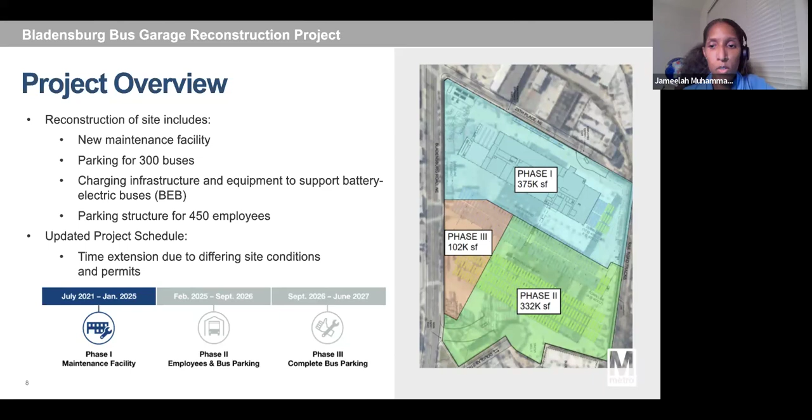We're currently in the first phase, shown in blue on the slide, which consists of the replacement of the maintenance facility, and this will now take place from July 2021 to January 2025. During the second phase, shown in green, we will focus on building the employee parking garage, as well as some bus parking on the ground level, from February 2025 to September 2026. During the third phase, in orange, we will complete the bus parking area. This takes place from September 2026 to June 2027.

We continue to maintain best practices for cleanliness and noise control at the construction site. This includes daily cleaning of work areas, waste receptacles and dumpsters stationed throughout the site, and tying down items to prevent flying debris during inclement weather. Also, the site contains DOEE approved water runoff controls.

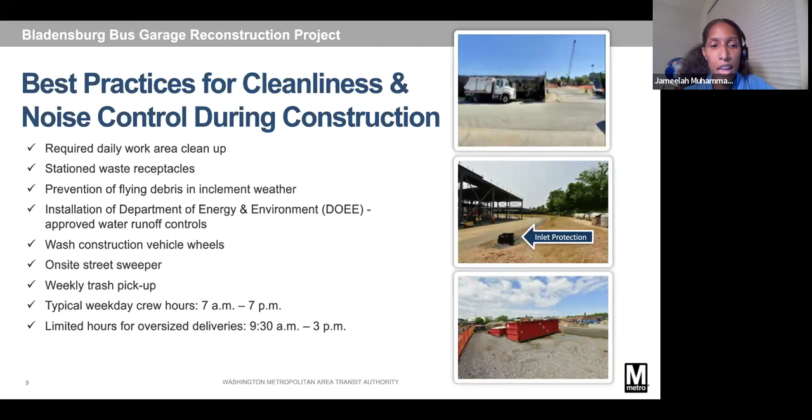We also wash muddy construction vehicle wheels to help keep the streets clean and have access to an on-site street sweeper to assist with this. We pick up trash weekly near the construction entrances as well. In regards to noise control, the typical weekday crew hours are from 7 a.m. to 7 p.m., and we limit hours of oversized load deliveries.

The site is bound by 25th Place Northeast, Bladensburg Road Northeast, Douglas Street Northeast, and the railroad tracks. In regards to construction traffic flow, Gate 1 on 25th Place Northeast has been serving as the main construction entrance.

In regards to parking, at this time, we have two areas designated for contractors' personal vehicles to help prevent congestion in the area. This consists of 2122, 24th Place Northeast, and the properties on 28th Street Northeast.

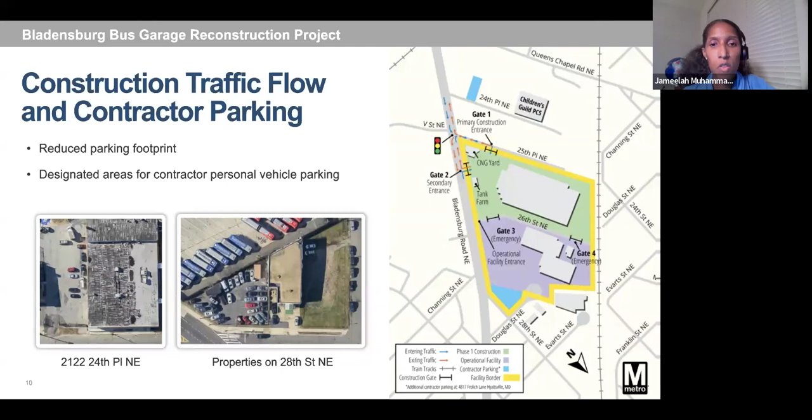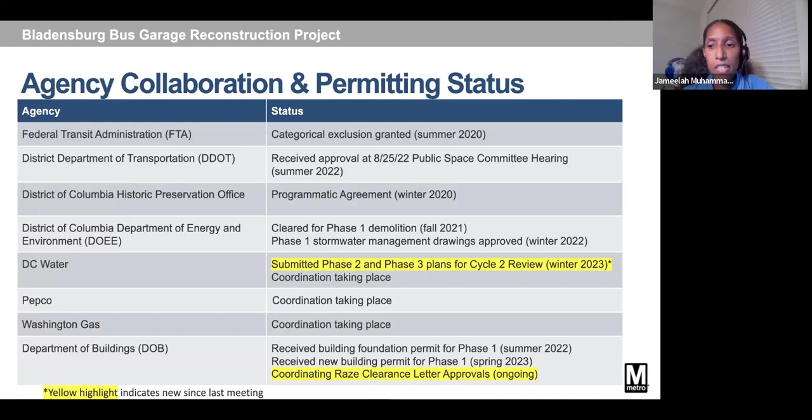Over the last quarter, we did release a quarterly newsletter, which included community meeting poll results, construction updates, photographs, and a video with a snapshot of activities taking place on site.

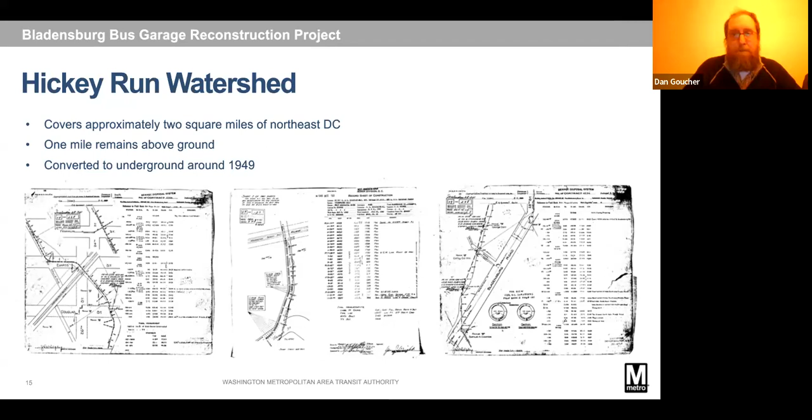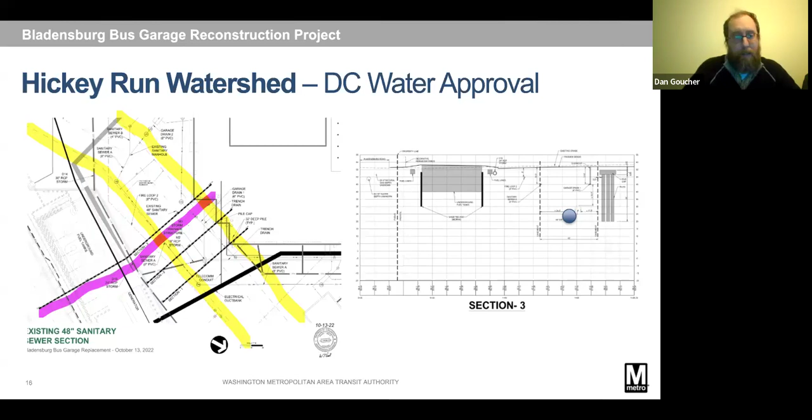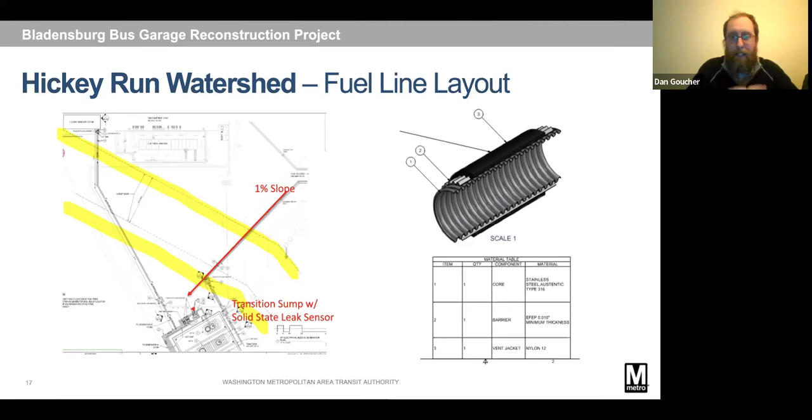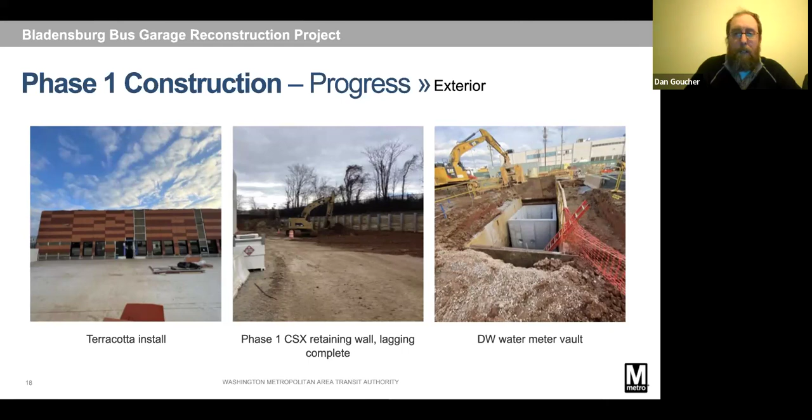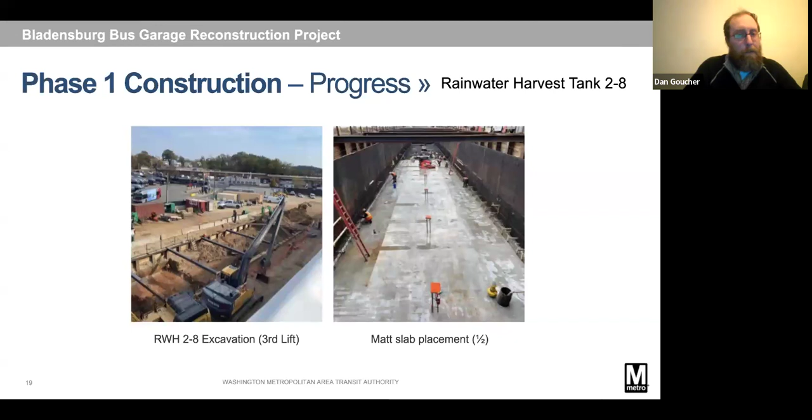We have put all the rebar up on the walls, and we have our first wall placement this Thursday. Basically every week, every Thursday, we will be placing the wall for the next 6 weeks. Then we pick up the interior columns. Once the walls are placed, we start the beams, which then support the lid, and the lid goes on. So we are well underway with the stormwater tank.

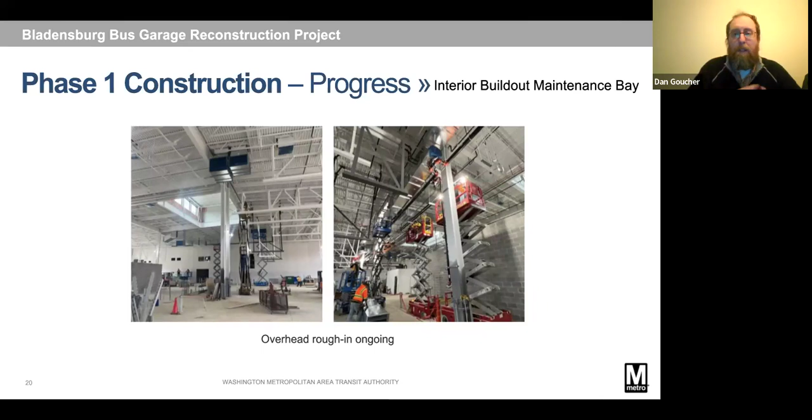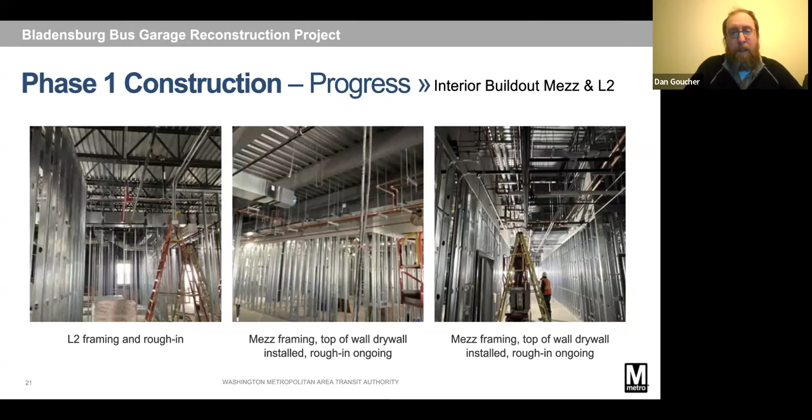You can see we're pretty much complete with all of that. The drywall's on, and we're just getting ready for bringing the drywall down the walls. Next slide.

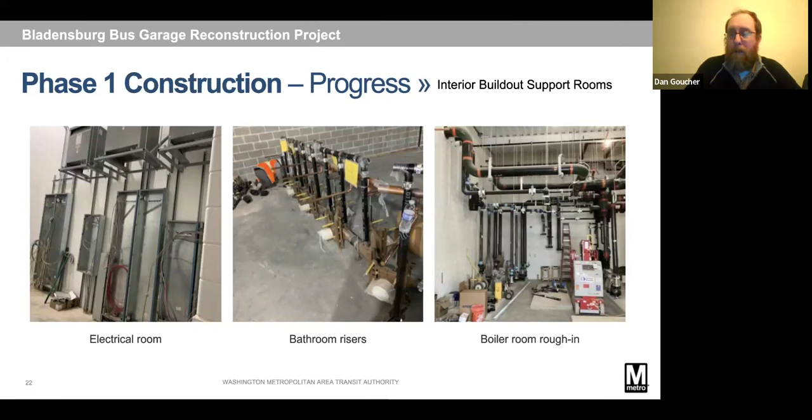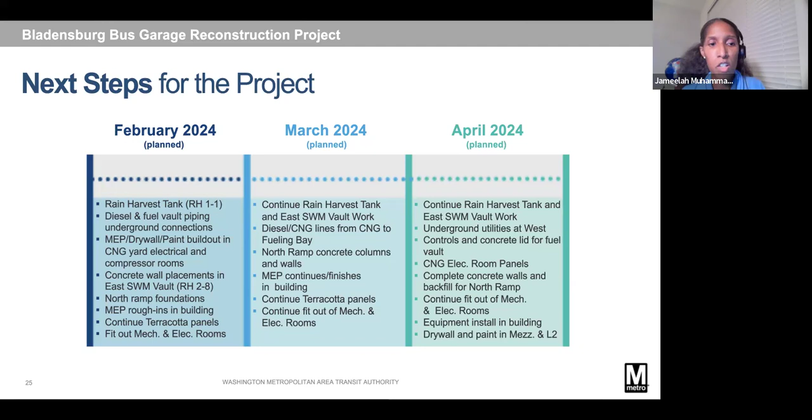In the month of March, we will continue with some of the work from February, such as the rainwater harvesting tank, the east stormwater management tank, the terracotta panel installation, and fit out of the mechanical and electrical rooms. We will also add concrete columns and walls to the north ramp. And in the month of April, we'll work on underground utilities, install equipment in the building, and work on drywall and painting on various levels.

Next slide, please. Here is an updated schedule for the remainder of the project. I'll highlight a few milestones, including completing the new maintenance facility in the fourth quarter of 2024, commencing demolition for phase 2 in the second quarter of 2025, completing the new parking garage in the third quarter of 2026, and overall project completion in the second quarter of 2027. We'll continue to evaluate impacts to this schedule, especially as the battery electric bus design progresses.

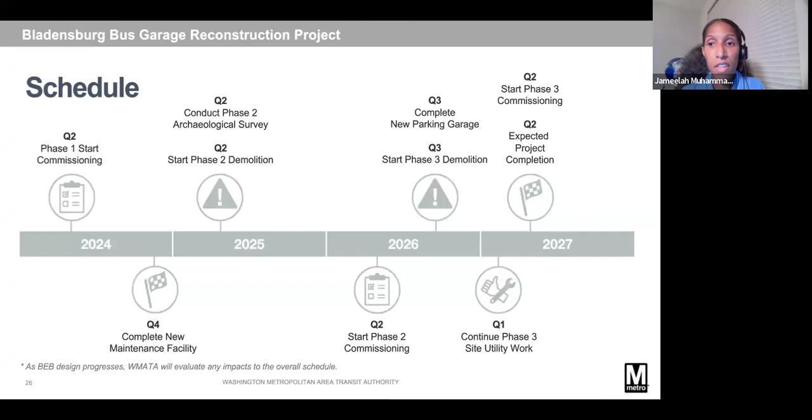And from there, I'll say thank you and turn it over to Maya.